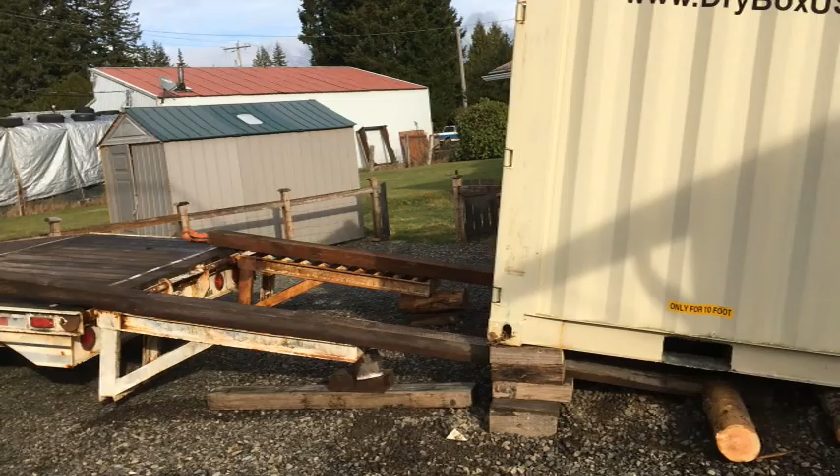Right now I'm making a winch plate for this 9,000 pound winch, and I plan on winching the shipping container, the 10-foot long shipping container, onto the equipment trailer and hauling it over to the property. So that's what I'm doing today.

Like I say, I got the old winch and it wasn't working yesterday, so I got that working. I re-lubricated the gear end on it and got it unfroze, and it operates very well now. I re-landed the ground, the black ground, on the bottom part and cleaned up the contacts and put a new fitting on the end, so that's fresh and new.

When I crimp these, I put no-ox or antioxidant inside here, crimp this, and then I put heat shrink on the outside. The heat shrink itself has an adhesive, so it basically bonds to the sheathing on this cable. I actually got this 1-aught battery cable for a battery project for some solar.

Gonna go ahead and get started on this. So I made a couple of 3-inch cuts to accommodate the fairlead coming through these rollers here, cut it out of angle iron.

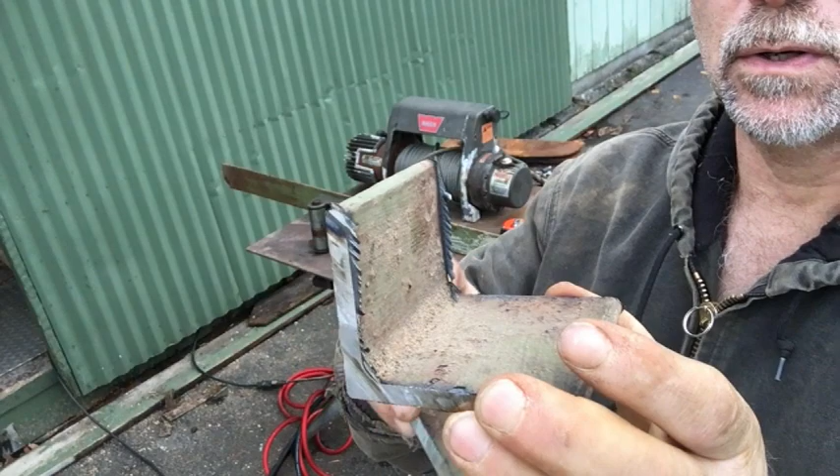These are actually still warm. So what I'll do is clean these all up, knock the sharp edges off of here. These are 3 inches by 2.5 inches by 1/4 inch thick. The easiest way to do that is to mount this onto this first and then weld it on. That way everything is exactly centered and where it's supposed to be. I'll go ahead and demonstrate that a little bit when I get going here.

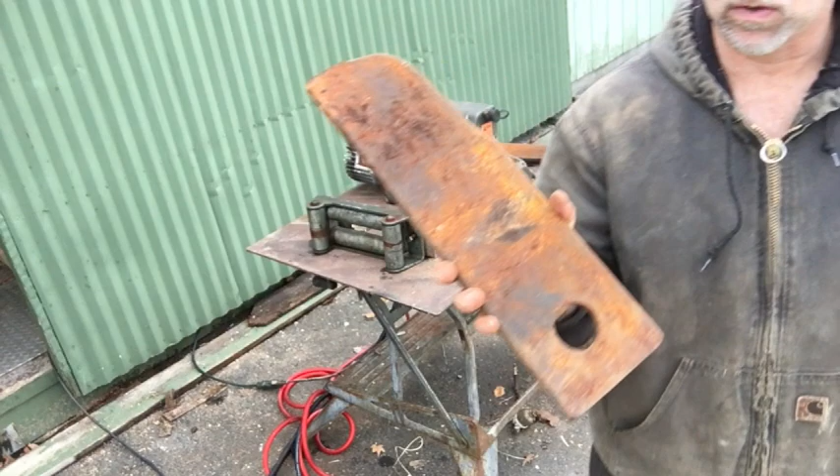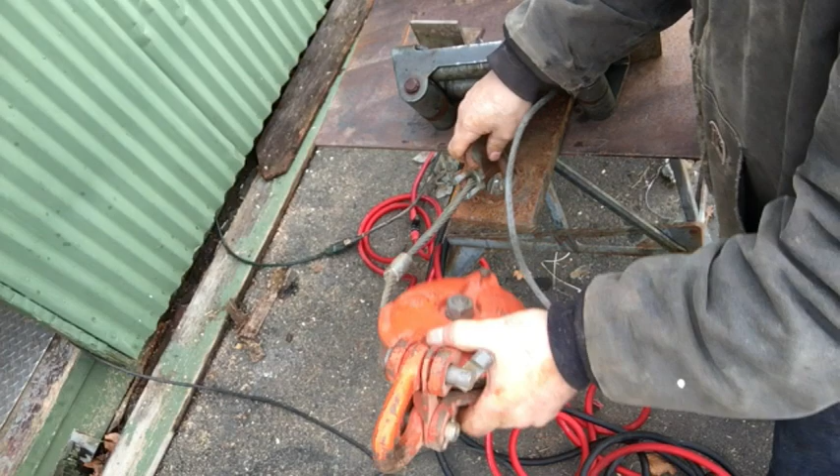I have these old flail mower blades the guy gave me, so I'll cut these off at 8 inches. That way I'll have a place to anchor the system to, and then anchor that to the trailer. We can have this to where this goes out to the load, and this goes back in through here. It's a little less stress on the winch when you pull like that. It's not quite double the strength, but it's almost double.

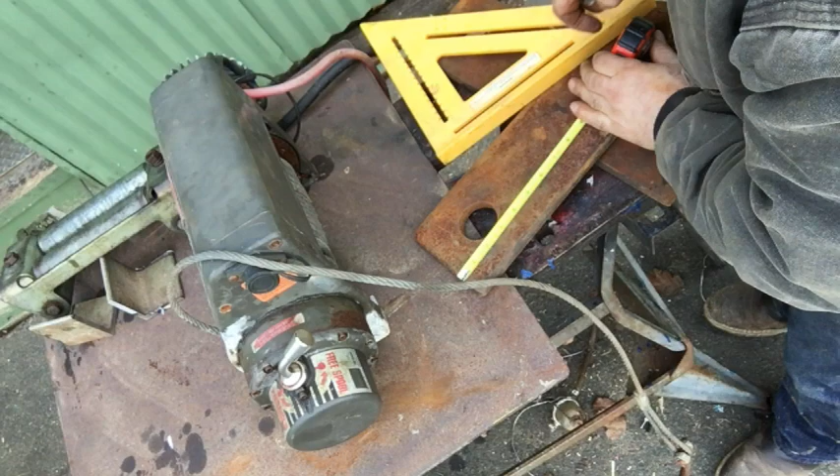That's the plan here, is to make a place where we can hook up something in the front if we want to. But first I want to get all this other stuff mounted up. Okay, I'll get these cut to 8 inches. I want to have enough to where I can weld in here so it'll displace the strength on this. We'll measure out 8 inches. Take my soapstone.

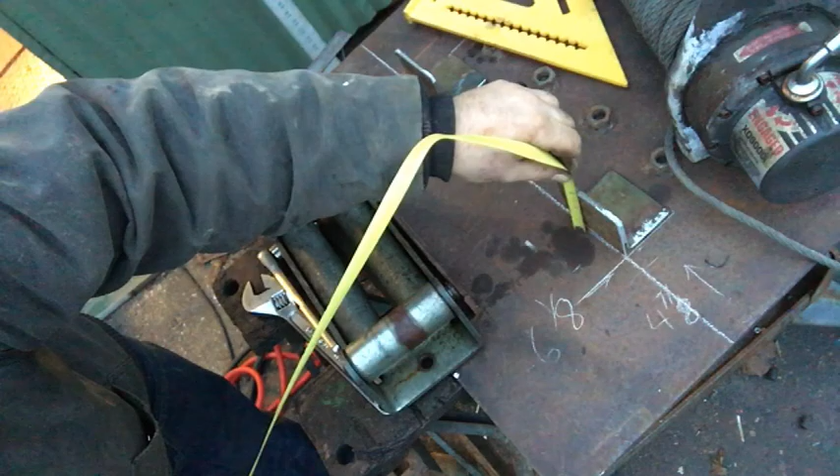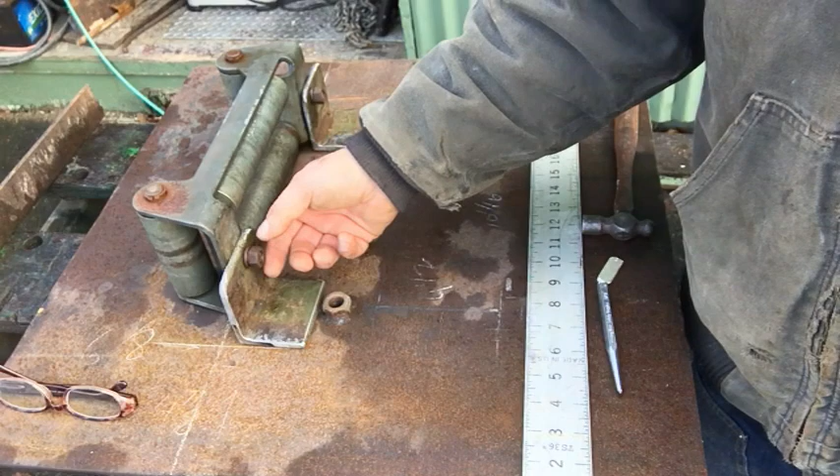So last night I went ahead and got everything lined up on the fairlead rollers and drilled the holes for the angle iron that's going to support the rollers. I just hand tighten these so they have a little bit of free movement here. So what I'm going to do is clamp this whole mechanism down to the table, and I'm going to weld around this area here.

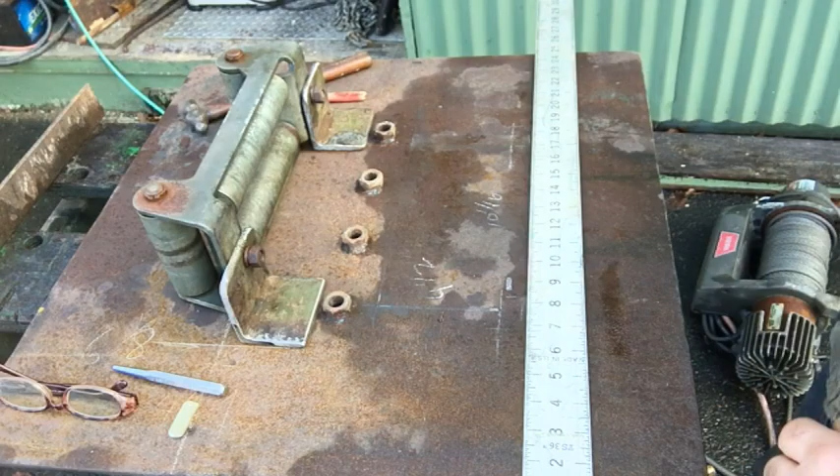I've got this centered on the plate, fairly close to these bolts that I had welded on here for another reason. Don't see any reason to take them off, so I just left them on. Besides that, I'm kind of on a time crunch right now, I need to get this done. But I thought I'd take you guys along for the ride, just in case you're interested in building something like this.

So I want to show you how I laid out the winch for the bolt pattern here. As you can tell, the motor assembly and the gearbox are not the same width. So I wanted to get the spool directly in line, or centered to the rollers, because if you didn't have this centered, then the line would have a tendency to wrap up on the spool on the left or right hand side.

So we wanted to get that right in the center. So these areas where the bolt's going to have to go through the bottom of this plate, I had to get all that lined up in retrospect to centering it on the fairlead rollers.

I measured center to center these holes, and the way I did that is I lined up, well, they call that burning an inch. So I lined up the one right at the edge of this hole. And then on the other side, I lined up the measurement on this side of the hole. On the right hand side of the hole here, I took a measurement, and that was 10 3/16 of an inch.

And so I did likewise on this. You can measure it on the outside or the inside of the hole, but you have to take the same measurement on both sides. Let's say I go from the bottom of this hole to the bottom of this hole, or the top of this hole to the top of this hole, and that will give me the measurement to center.

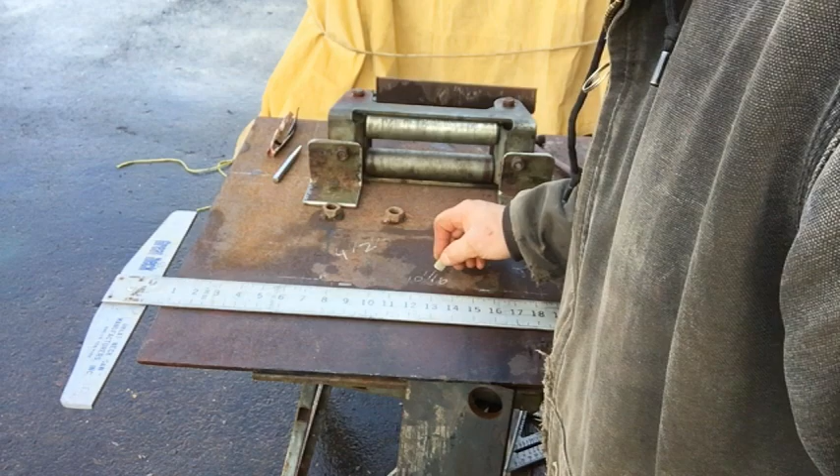So I had 4.5 inches here, and then the measurement I just told you. So knowing those measurements, actually that's supposed to be 3/16 or 3/32, and then this one was 4.5. Now this winch is a fairly old winch, and I don't know if all the winches are made the same with the bolt pattern on the bottom or not anymore. But that's how you find the layout of this, is to take the measurement center to center on those bolts.

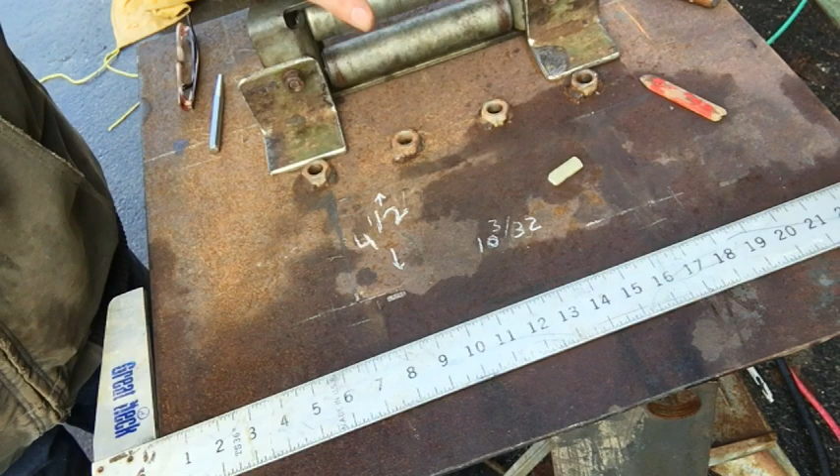I want to square everything up with this, because I squared this up last night, so I can take all my measurements off of the ends of these, because these are all machined alike. And so I could come up through here and take my measurements.

Now when I find out where my measurements are, I could take a measurement from the edge of this angle iron out to where I know the winch is actually going to sit in here, not too close to the bolts, so I could lay out my pattern and make a straight line. I could set back away from the bolts a little bit so they don't interfere.

Then I came in here and I scribed the line. Now you can do that with a pencil. This isn't as finite, but if you can get a broken edge on it, soapstone, you can get fairly accurate. But you can also take a carpentry pencil, or a Sharpie, or a felt tip pen, and scribe a straight line all the way down through here.

Now I can take all my measurements off of this line. I can take the center of the spool to the center of my fairlead rollers. I always want to be cognizant of that.

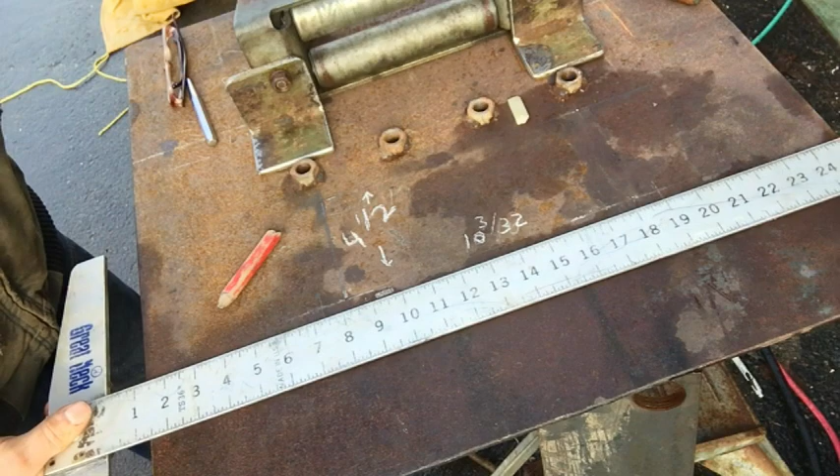And so with this straight edge, I can line it back up. I can make my measurements on this line here, find out exactly where the center is, divide that number in half, that 10 3/32, to get that winch exactly centered on that spool.

And then as soon as I get these marks indicated, I made an impression with the center punch on each side. Now I double check my measurements and make sure that that's 10 and 3/32 exactly.

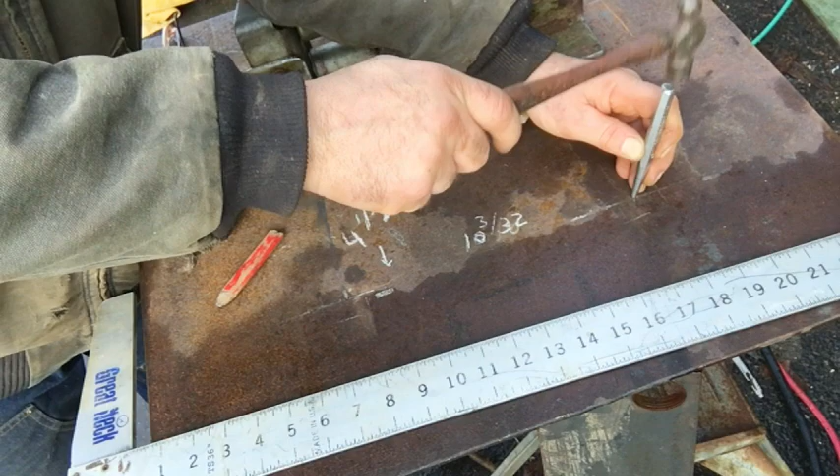If it's not, what I do is I make a light impression first, and then you can hit it one way or another, and that will push the hole left or push the hole right or up or down. Once you get that finite measurement, then you really make an impression and get your points established on that. Well, after I established that, I found center to center, which was 4.5 inches.

I always go to the center of the hole and measure to where the center of the hole is going to be. Now, how do I know that's going to be square or not? Well, I can take my straight edge and go through the center of my holes.

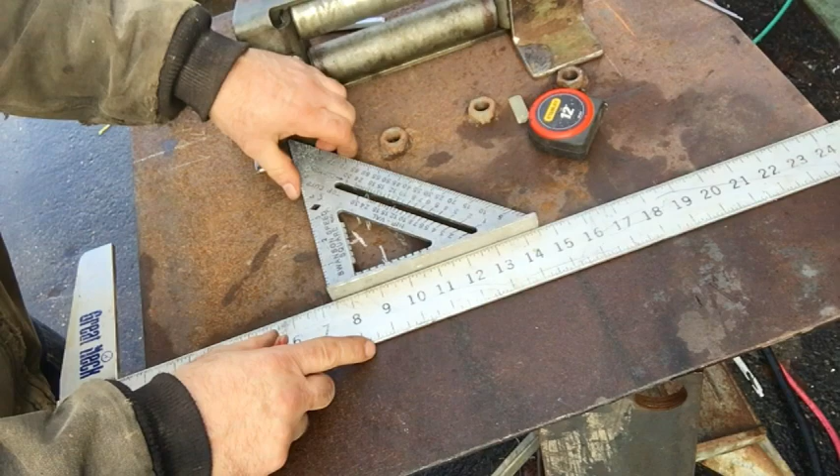You can go to the edge if you want, but I always like to go to the very center of the holes. Then you can take a straight edge, or in this case a speed square - I don't have a smaller square, but if you had a smaller square that laid flat on the metal, it's easier to ascertain where that line's going to be, because you have this distance between here and here, and that's quite a distance.

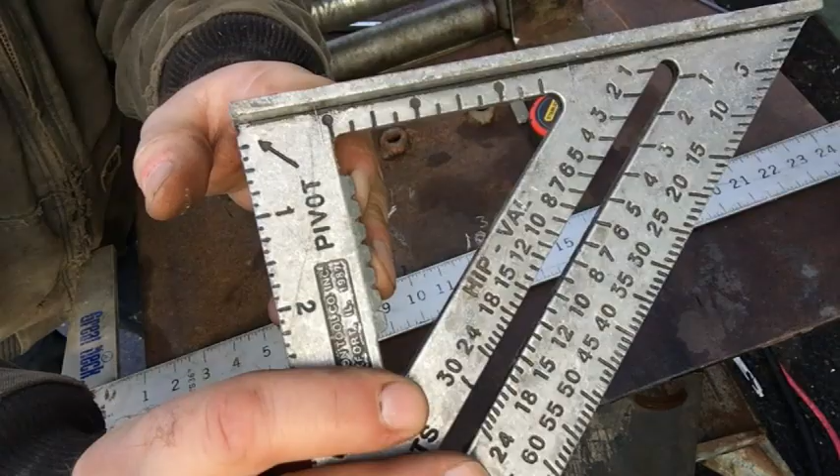That's like 3/8 of an inch to 1/2 an inch. So I had to make that mark a few different times and line it up, line of sight, looking straight down on top of this hole here. I line that up to where I can't see the edge of this square. So when that edge just disappears, I know I'm looking vertically on top of my work.

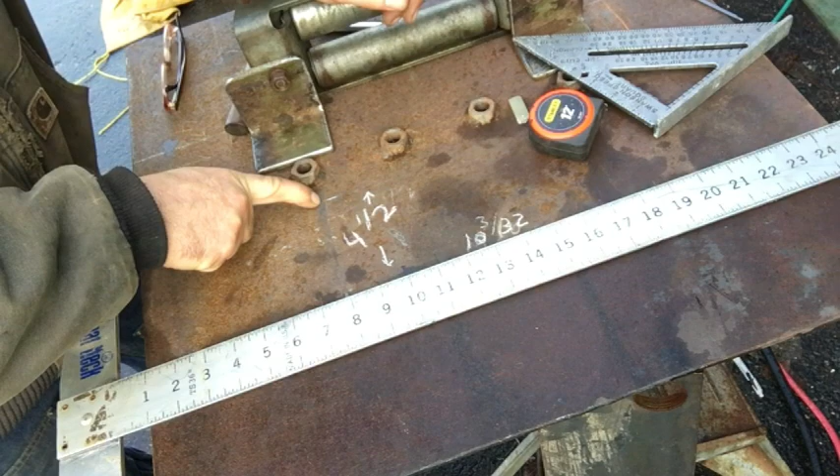So I get that lined up and I mark that hole at 4.5, and that way I know I have a square definition here. So I can mark that lightly with the punch, and then go over here and do likewise on this side, making sure that this measurement from here to here is exactly the same as the measurement from here to here.

And you can measure here to here and make sure that this measurement is exactly the same as this over here. Now there's various ways of doing that - you can do cross measurements in here to verify, but this is a pre-engineered cast 90-degree angle, so I'm not going to bother taking cross measurements because I know this is 90.

So anyways, I got that laid out the way I want it to be. Now what I can do is drill all these holes here using the proper size drill bit - measure the inside of that hole. That's the 3/8 of an inch hole. So I can measure this hole, and I come up with 3/8.

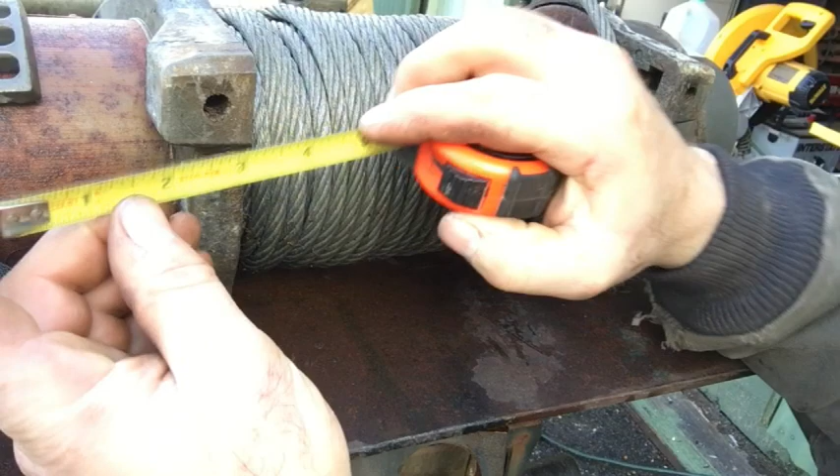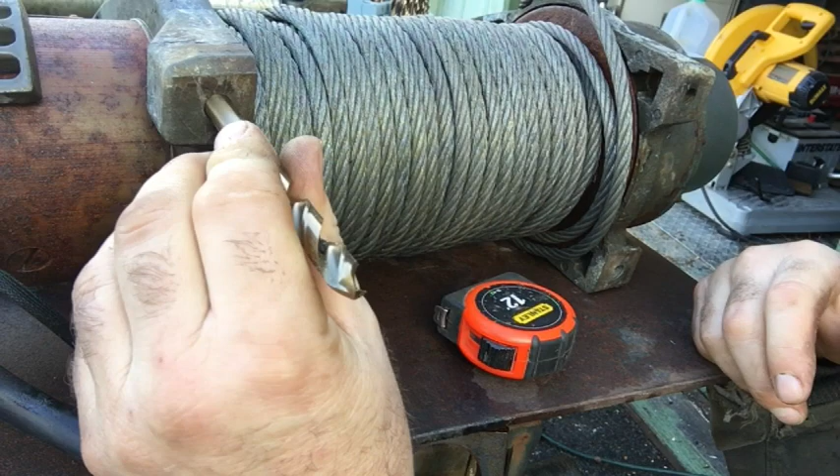Let's say that's 3/8 of an inch right there, see? Or you can also take a drill bit or drill index and see what size hole that is. That's actually got a little bit more slop than this 3/8 inch drill bit, and that was indicative of what the caliper said too. So I'm going to go ahead and use this one here - it gives me a little bit more room for error.

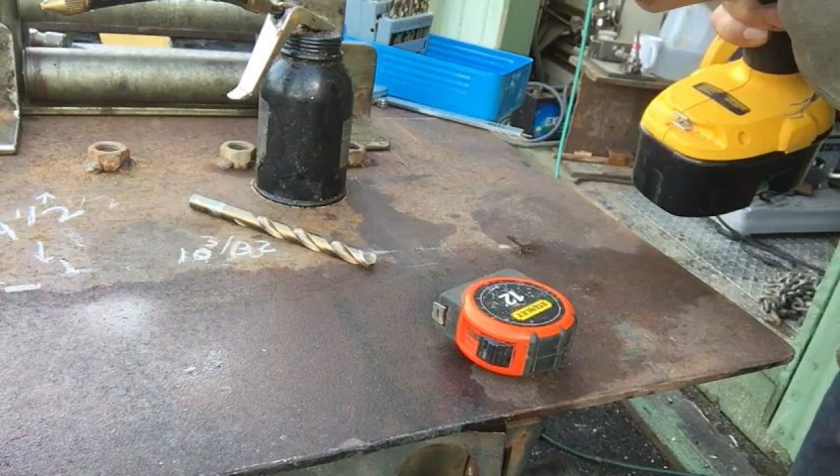So this is a 25/64, just a little over 3/8. So I'm going to drill a pilot hole first - that just saves the bits a little bit.

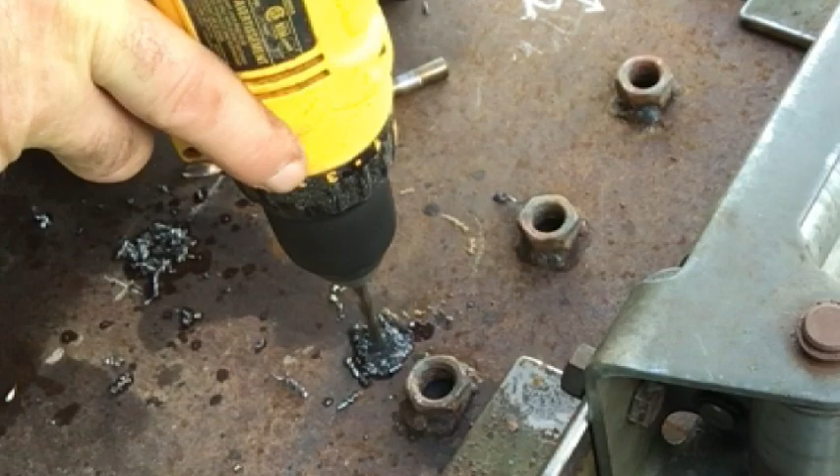I want to make sure that the little holes are lined up to the bottom of the winch before I go any further. I just use this punch as an awl and run it up to the bottom of the hole and line it up to the mounts for the winch.

And I just run the bolts in there just enough to know that they're going to start to thread. I want to do that with every hole just in case one hole's off a little bit - then I can make corrections now. Okay, that's holding. Then I'll run over here to the opposite hole and run the threads in a couple of times.

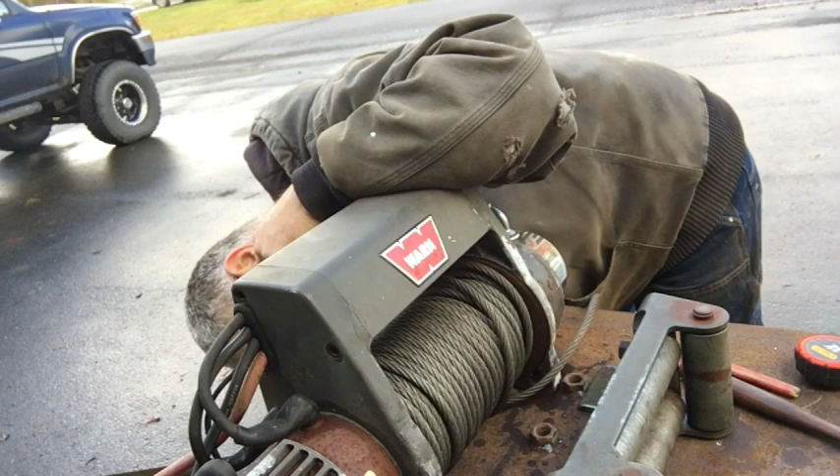Okay, they're all going to work. So now I know that all of the bolts line up, the mount's going to work. I'll take and remove the winch, set it aside.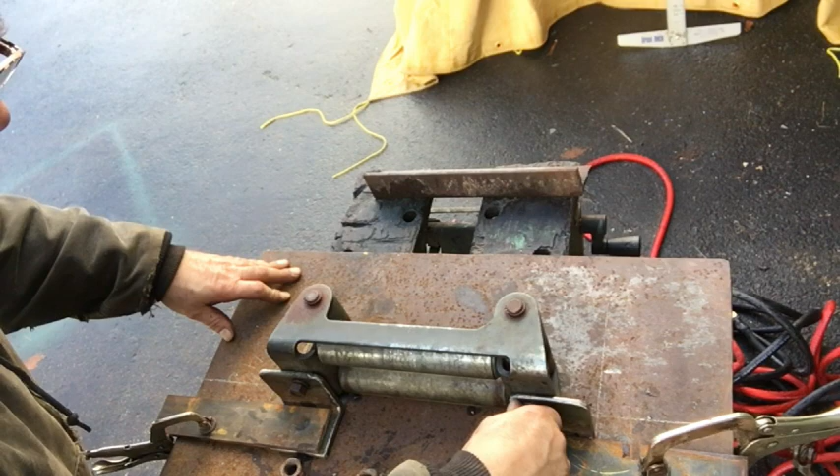If you didn't understand before why I just finger tighten these and assemble this on the fair lead rollers, it's because now when I weld all this together, these mounting holes will be perfectly lined up with the fair lead roller assembly, and there won't be any question. Those holes will line up perfectly because now they're being held in place. I can weld all this together.

So I changed my mind on the clamping situation here, because when I clamp this down, this is going to be pressing harder against the base than this corner over here. It's probably not a big deal in the scheme of things, but I think it's a little bit more accurate if I can clamp this on evenly with one piece clear across here, equal pressure all the way across. So in short, I'm going to place a longer piece in here to get equal pressure all the way across the surface of these two mounting angle iron pieces.

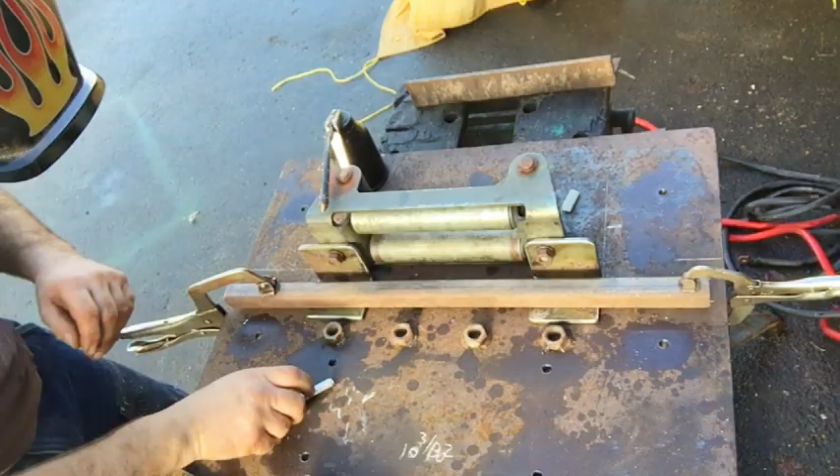So loosely clamp that one. Got that one just a little bit tighter. That's holding it in place. It's probably good enough, but I'll come back and check the pressure on this one. It could go for it to be a little bit more. That's really solid, so I'll remeasure and make sure everything is where it's supposed to be. It didn't move on me.

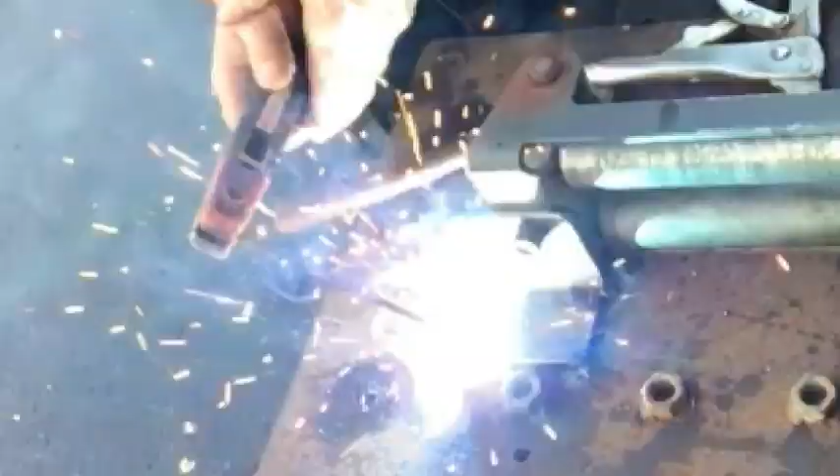Now, I don't make any claims to be a professional welder, as some of you who know better can tell. I know you should clean the metal up and make sure there's no grease, or in this case cutting oil, and remove the rust if you can, remove the paint. But I'm using 6013, that's pretty forgiving with old rusty metal, been my experience anyway. I'm kind of in a rush, so I probably shouldn't even be doing this video, but at any rate, we're just going to burn through it and hope for the best.

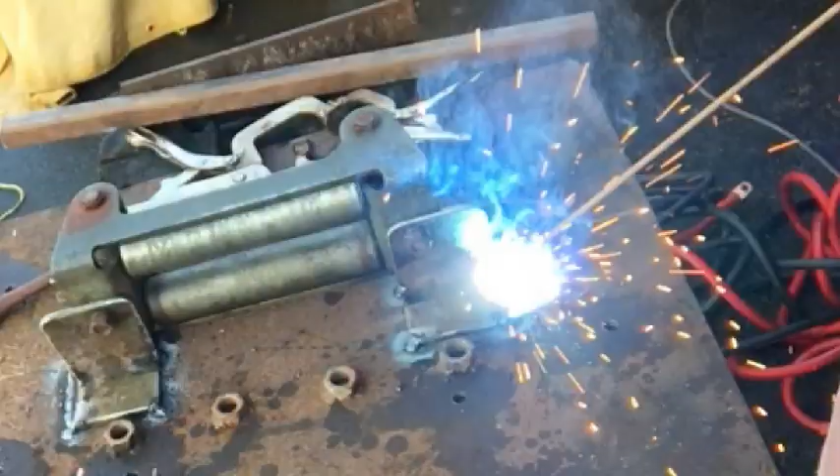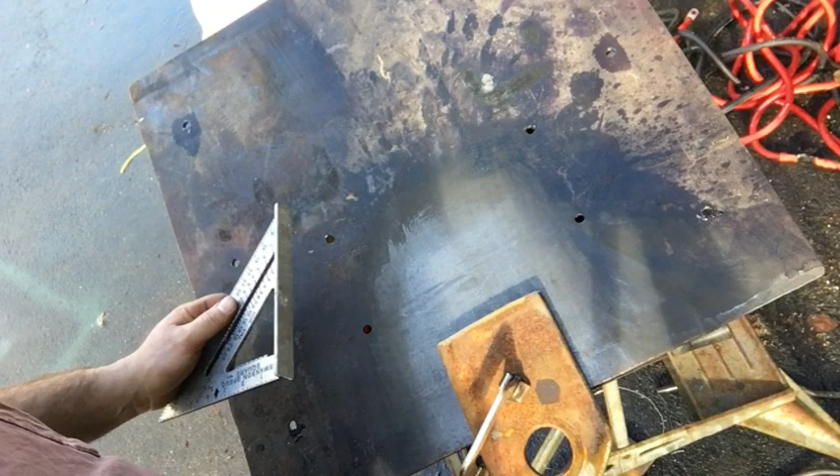I have the plate flipped over. The backside was pretty dirty, so I did use acetone and clean up this area pretty good so the weld will stick. But I got this centered and squared, and now I'm ready to weld this in place. This will be the tail hold for the whole thing. Hook a chain to this and then hook that to the D-rings on the trailer.

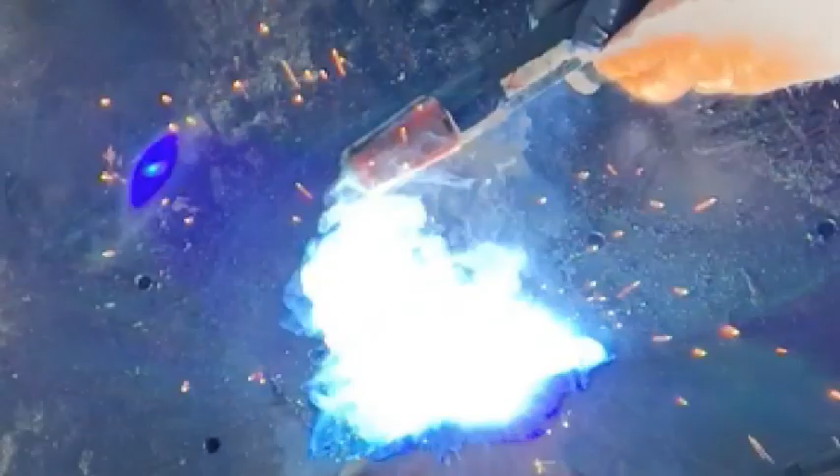Well, it ain't drop dead gorgeous, but I think it'll hold. I ended up turning up the heat and trying a couple of different techniques, and I think that'll do okay. I'll flip it back over and weld the back side of this where the top of the base meets the tail hold area.

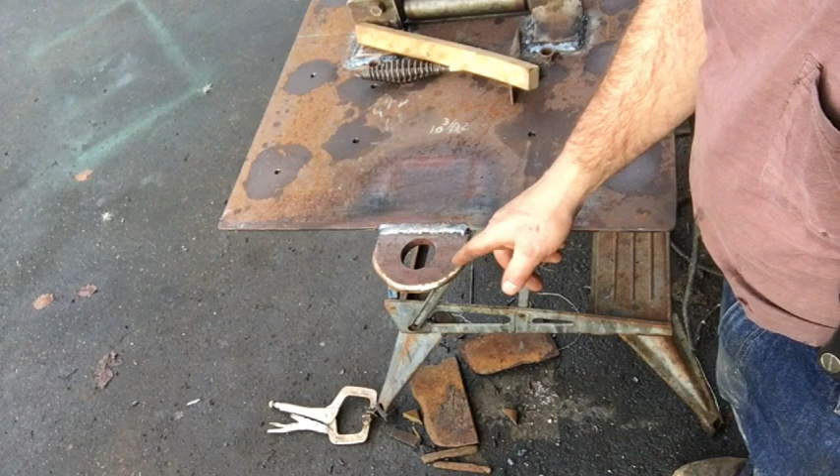Well, I think that's good enough. This is a thicker piece of metal than this, so you want to hold your welding rod closer to the thick metal because it takes longer to melt than the thinner piece on top. So a lot of this stuff, by the time I get done with my welding project, I may remember these things. But the welds are getting a little bit better. The ones over here, I know I didn't have the heat up high enough, and that's why they look so terrible, but it's going to work out just fine.

We'll let that cool, and I want to make another one of these for the front.

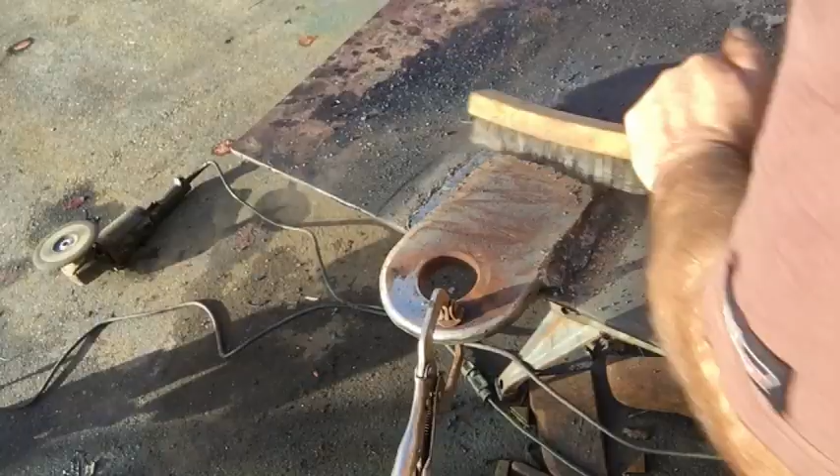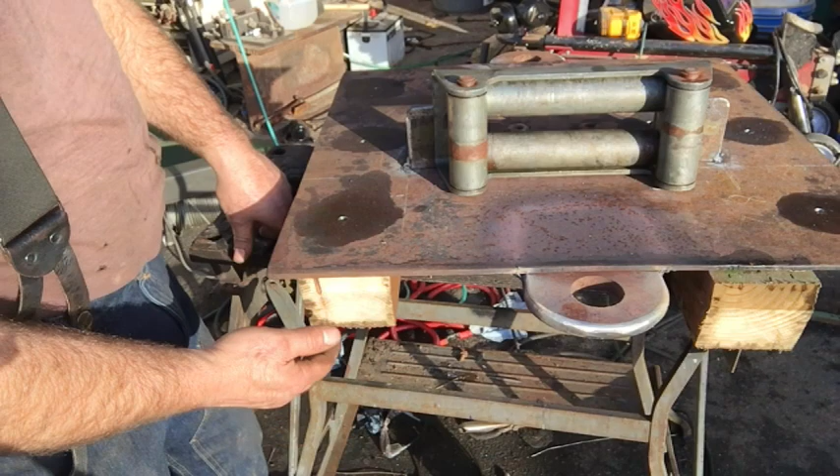Now, as you can see, I built a couple of skids here in between filming, and what this allows me to do is allows this whole platform to sit on any surface but not scratch the surface. So these wooden 4x4s that I have underneath here will suspend this over or raise this above whatever I set this on. So if I set this on the deck of the trailer, then it won't skin the trailer as it's moving back and forth.

Another thing I was planning on doing yesterday was taking both of these little rings here and having them for the hold in the back, but I got to thinking about that last night. I want this to be able to face perfectly towards the load at a perpendicular, or 90-degree angle, however you want to view that. Now if I had two holds in the back, it would try to hold this straight, and let's say the line was heading out this way.

Well, as it spools in, it's going to want to stay on this side of the spool on the winch. So if this is always facing towards the load and the line is facing out that way all the time, it'll be easier to track the cable back onto the winch itself, on the winch spool. So that's why I went with a singular attachment on the front and the back.

And so this attachment here will be if I wanted to double over a block on the load and then come back and tie into this. That way that'll increase my pulling capacity of the winch. So I need to go ahead and bolt these on.

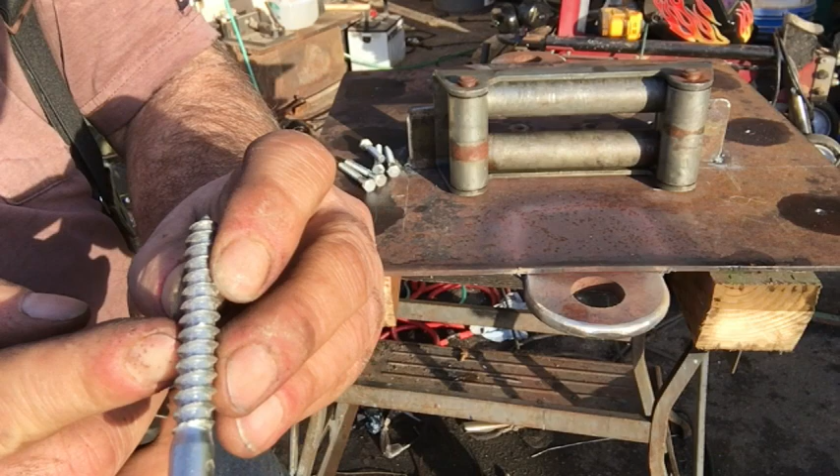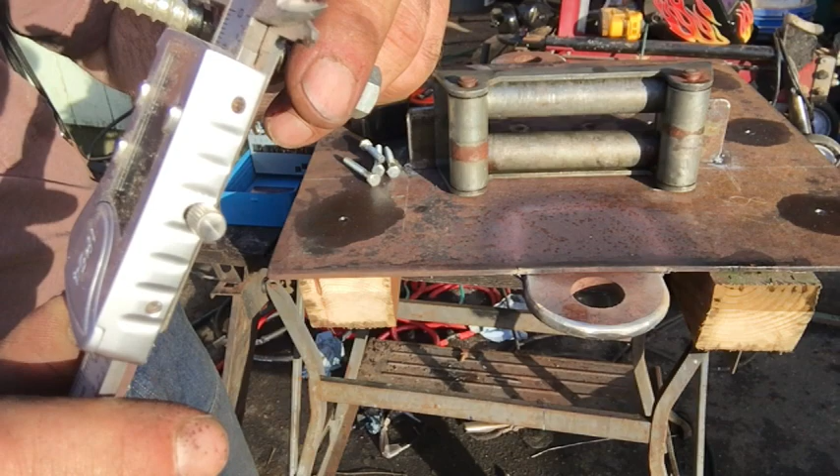I like the DeWalt tools, but I'm not a big fan of their chucks. They don't seem to hold that well.

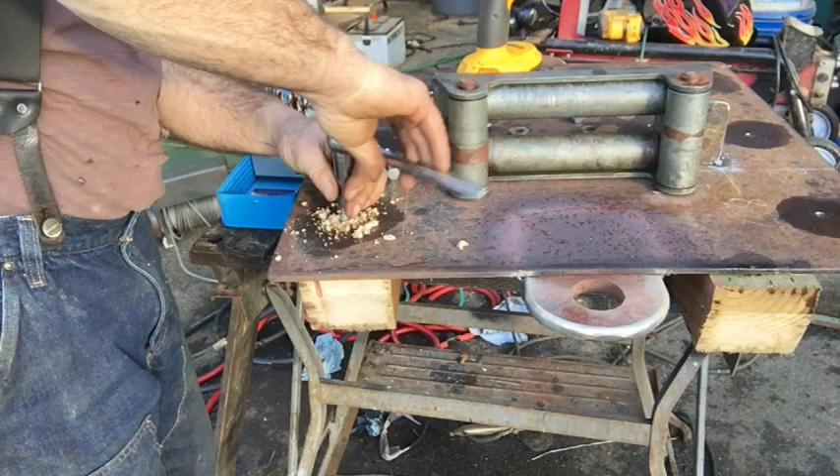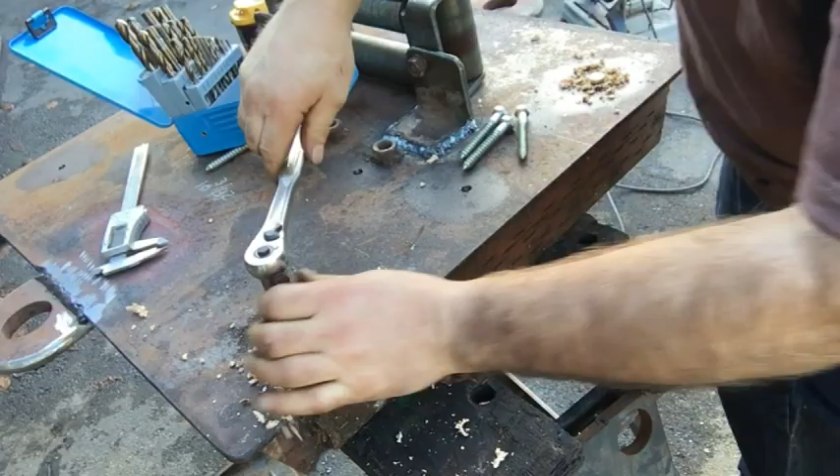I got the two lag bolts in the ends. I can go ahead and tighten the front one back down, or tighten it all the way down, and then finish out the middle one.

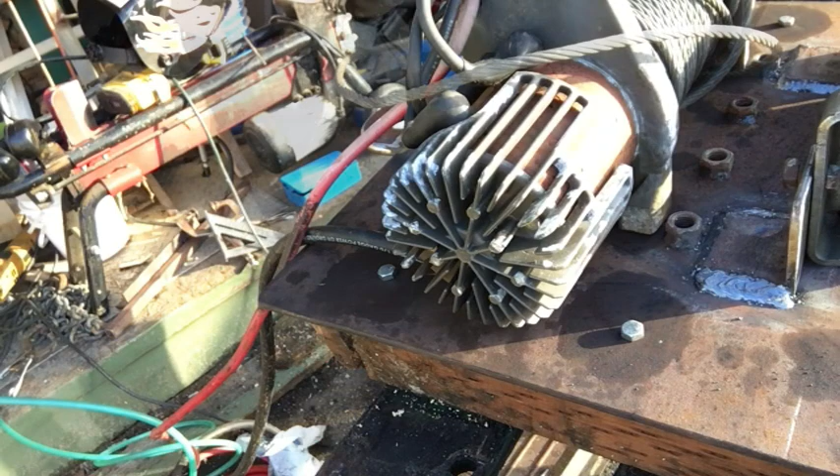Now it's just a matter of mounting the winch and figuring out a way to get it out to the truck. I think I need to go buy a mule or something like that so it can pack it out there, but 4 men might be able to lift this.

I don't know. Well, we got the winch on here. We're going to go ahead and mount it.

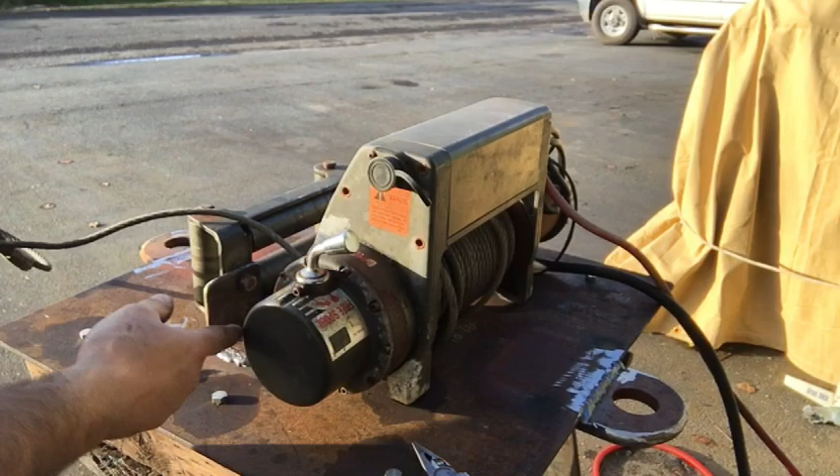I ran a bead, another welding bead across this front piece after I turned it over. I actually did weld a couple more, redone a couple of these welds after I turned up the heat on the welder. Again, this isn't a welding video. Some of you guys that actually weld really well out there will probably view this as comedy relief or something, but I don't think it's going to go anywhere.

Now we have this to where this can hook back on itself using a block. We can put a block in here on the load side and not quite double our strength, but definitely get a lot more power out of the winch by doing that. Theoretically, I think you're supposed to be able to double it, but you've got friction and all kinds of games that physics plays with you that keeps you from getting a full double pull on this thing.

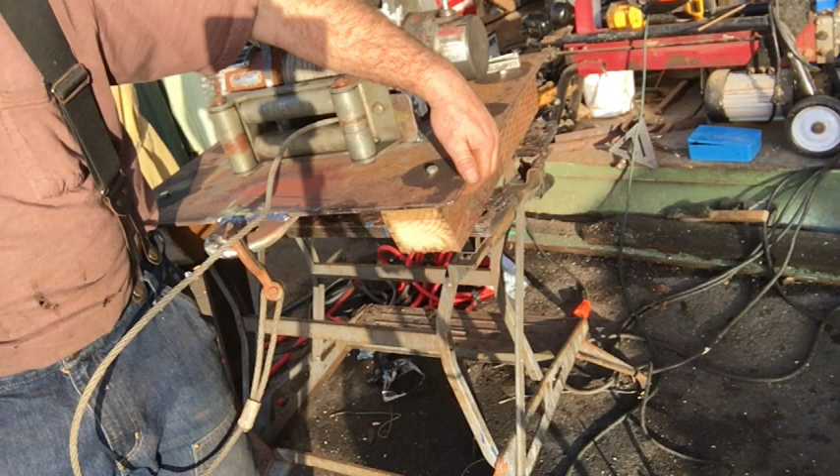So anyway, I'll get this mounted up and get it on the truck. Down here we can lift it. This actually kind of gives it a little bit of a handhold here. You can see underneath here, you can lift this up by hand, with your hands.

If these little runners or skids were not under here, this plate would fit flat on the trailer bed, and it would be difficult to get your fingers underneath here to lift this thing up and move it around. Also the skids act as an anti-scratch, so it won't scratch whatever it's sitting on.

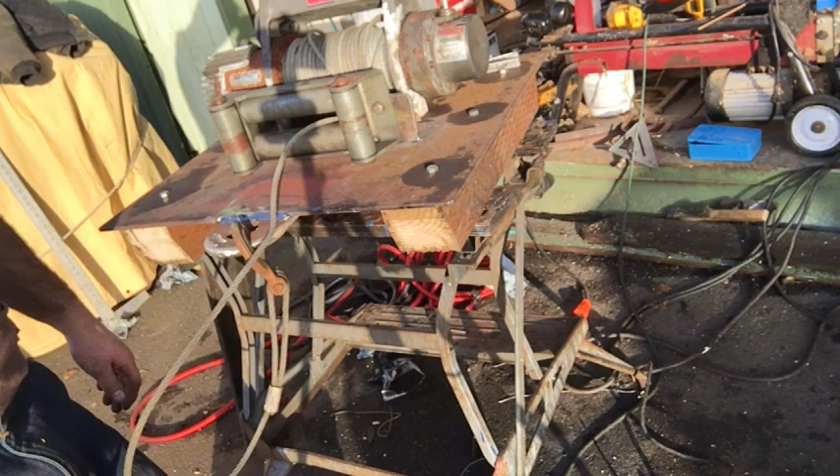I hope this gives you some ideas of what you can do and maybe even improve on it. I just thought I would get you guys a little bit of video shot of this thing. But anyway, hope this helps you guys out. Take care and God bless.